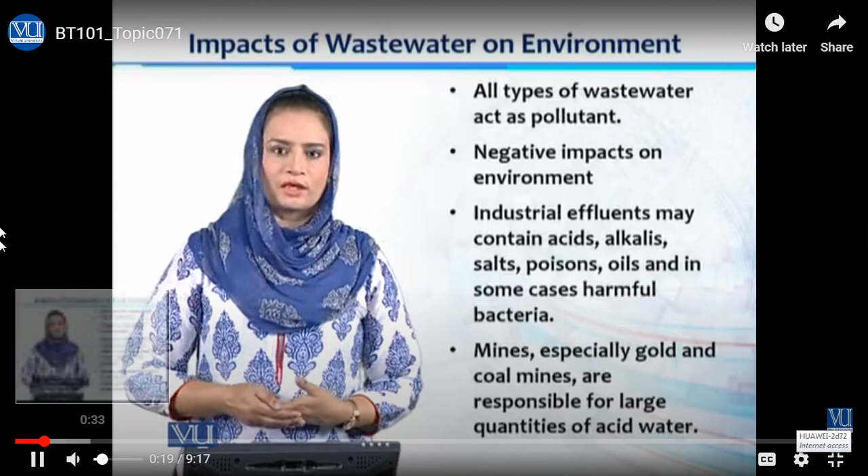We have discussed different types of pollutants released through municipal, domestic, industrial and agricultural waste. All these wastewaters contain different pollutants, which are bad materials with negative impacts on our environment. Industrial effluents may contain acids, alkali, salts, poisons and oils, and sometimes pathogens such as harmful bacteria and viruses. Other than industrial wastes, mines also release huge amounts of wastewater, especially gold and coal mines, releasing acid water into natural drains.

Agricultural pesticides, fertilizers and herbicides released through wastewater from agriculture are discharged into natural rivers, streams and stagnant waterways. Sewage also contributes as wastewater, containing a comparatively lesser amount of pollutants but including detergents, pathogens, dust material, plus paper and pulp waste. Like other wastewater, sewage is released into water bodies, polluting our natural water reserves. To understand how this wastewater pollutes the environment and impacts the water ecosystem, let's watch this video.

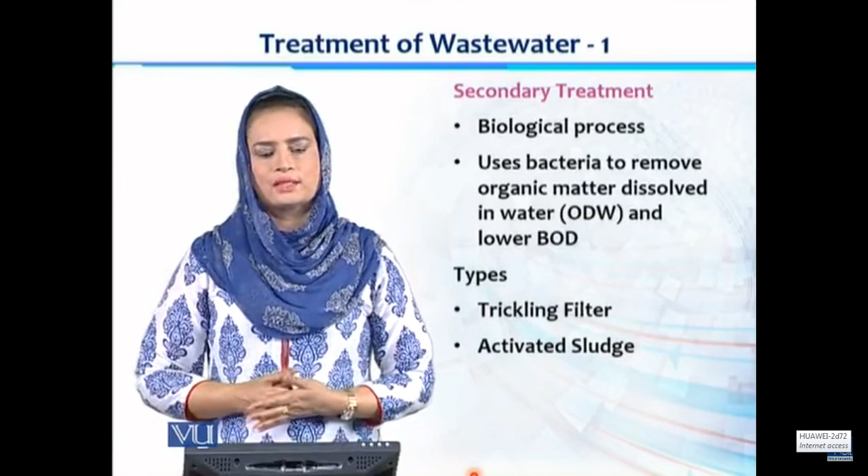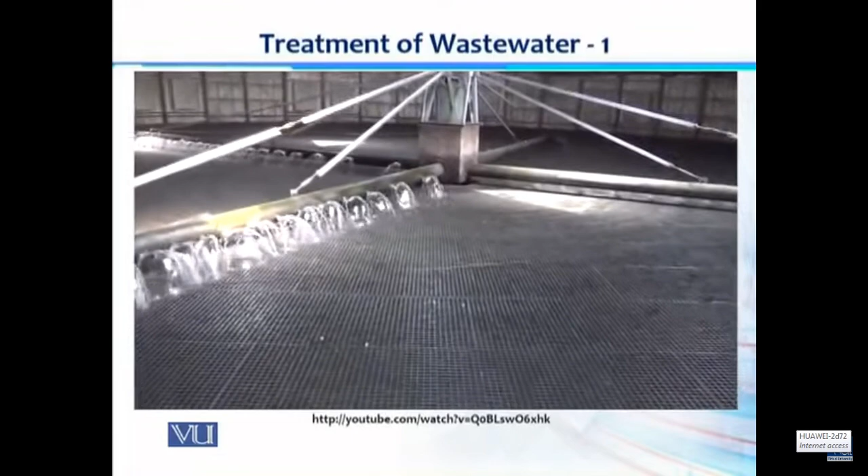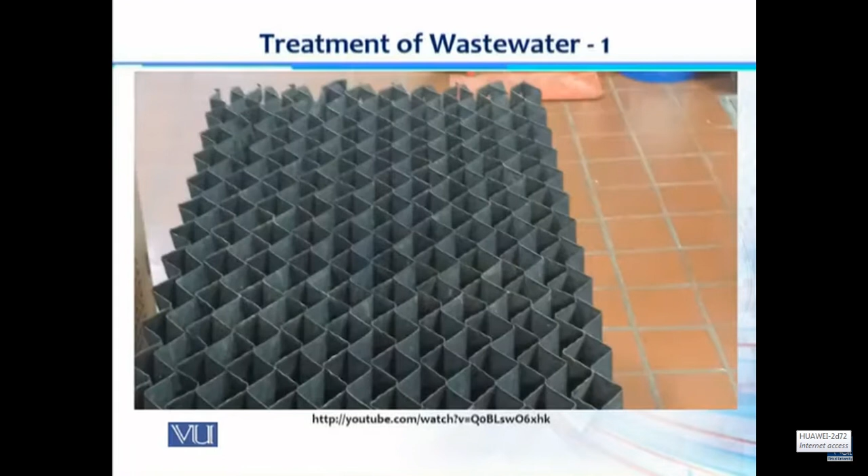Wastewater pumped from the primary effluent well to the top of the two trickling filters is spread evenly across the surface through revolving pipes known as distribution arms, which have holes called ports. The trickling filters are 86 feet in diameter and about 46 feet tall, visible along Route 1 between Cook's Corner and Main Street. Biological treatment happens when microbes consume organic matter in wastewater, converting it to carbon dioxide, water and energy for growth and reproduction. The microbes grow on plastic cross-flow media resembling a honeycomb, 22 feet deep in each filter. This design allows more biological treatment in a smaller space due to increased surface area—3,830,000 square feet per filter, equivalent to 80 football fields. More area means more room for microbes to grow.

The slimy growth on the trickling filter media is called zoogleal mass, where microbes such as nematodes, stalk ciliates and rotifers live and break down organic chemical bonds in the waste. When biological treatment is complete, the microbes have eaten their fill—fat, dumb and happy. They die from lack of oxygen, fall off the filter media, and exit the bottom as a solid called humus, also known as secondary sludge.

तो इस वीडियो में हमने देखा कि किस तरीके से ट्रिकलिंग फिल्टर्स माइक्रोब्स से लाइंड होते हैं, और उसके ऊपर सीवेज वाटर ड्रॉप किया जाता है जो कंटिन्यूअसली फ्लो होता है। यह वाटर उन सेल्स से पास होता है जो माइक्रोब्स, स्पेशली बैक्टीरिया और अन्य माइक्रोबियल ऑर्गेनिज्म्स से लाइंड हैं। यही वजह है कि माइक्रोब्स उस पास हो रहे वाटर में पहले से मौजूद माइक्रोब्स की मैक्सिमम पॉसिबल किलिंग करते हैं, और वहां मौजूद डिसॉल्व्ड ऑर्गेनिक मैटर की डिकम्पोजिशन में अपना रोल प्ले करते हैं। लेकिन इस तरह के ट्रिकलिंग फिल्टर्स बनाने के लिए बहुत इन्वेस्टमेंट चाहिए होता है, और सभी देश या समुदाय इस तरह के ट्रीटमेंट afford नहीं कर सकते।